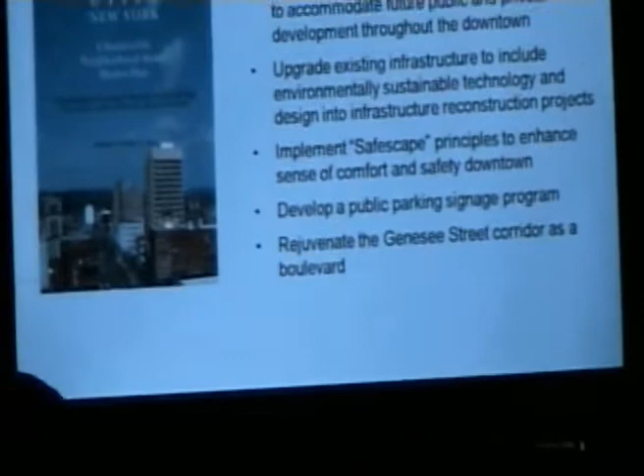And in going through that master plan, there is a specific section devoted just to downtown. In looking at that section, there are a number of goals and objectives that were included in the master plan that have been incorporated into this plan, including the 5 bulleted goals and objectives on the screen now.

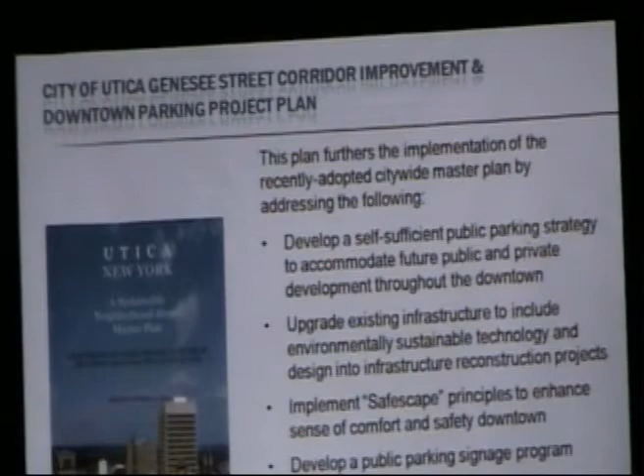First, mentioned in the master plan was to develop a self-sufficient program for public parking, meaning a plan that pays for itself, that accommodated future public and private development throughout the downtown.

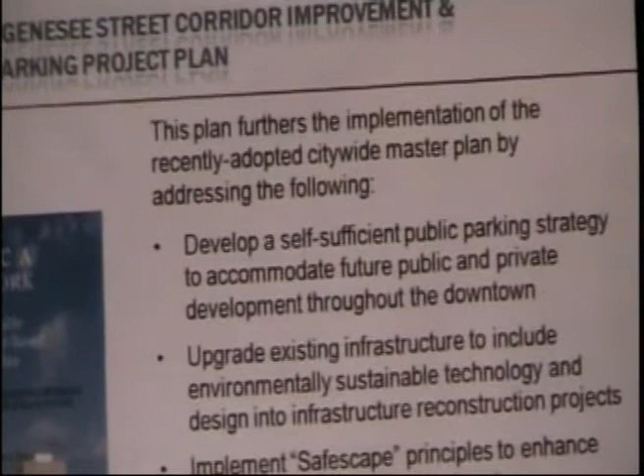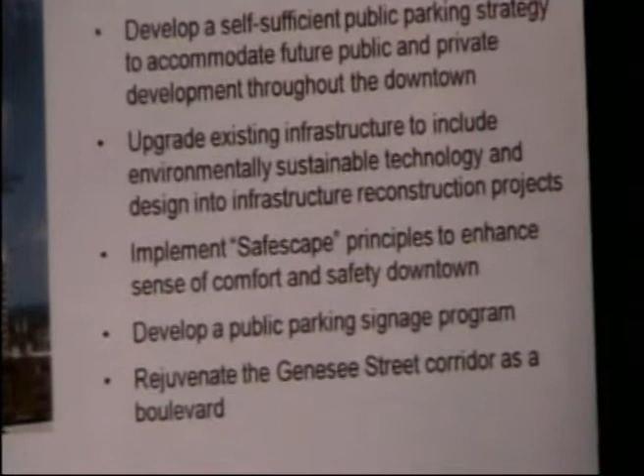Second was to incorporate environmentally conscious infrastructure in any infrastructure project throughout the downtown. Third was to utilize safescape principles, meaning that any streetscape that's designed is done in a way that keeps in mind the safety and perception of security that people have when they visit the downtown.

The fourth goal and objective in the master plan that we incorporated into this plan was to incorporate a public parking signage program. When a lot of us go to other downtowns, you often see the blue letter P sign, which indicates public parking in a lot of different municipalities. The city of Utica doesn't have that, and for a lot of visitors, it's difficult to know when they enter the downtown where the public parking opportunities are. We're seeking to address that through this plan.

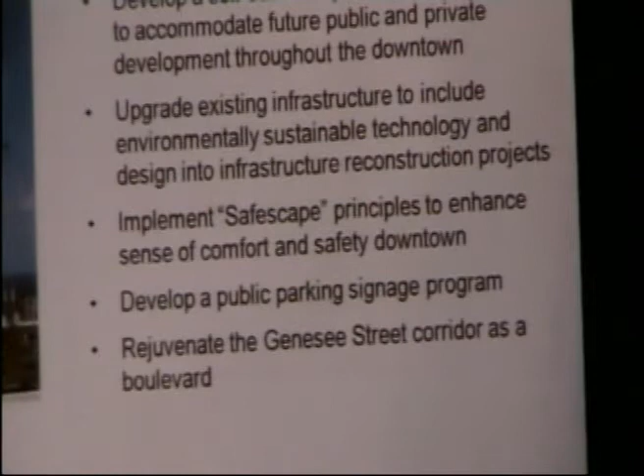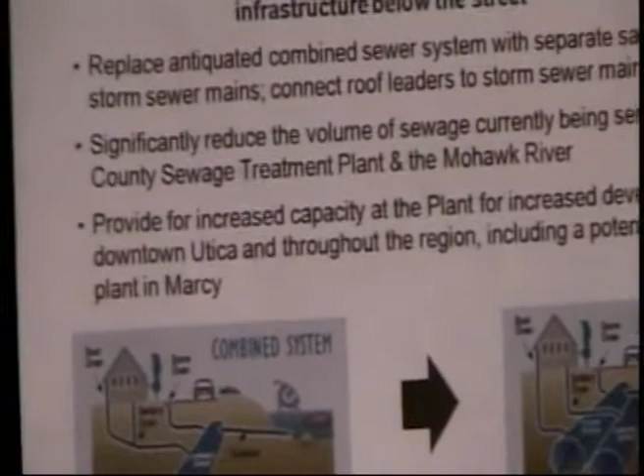And finally, the master plan called for rejuvenating the Genesee Street corridor as a boulevard. With that, the first project goal was to enhance economic development opportunities in the downtown, as well as citywide and regionally, through a complete reconstruction of the sewer infrastructure below the street.

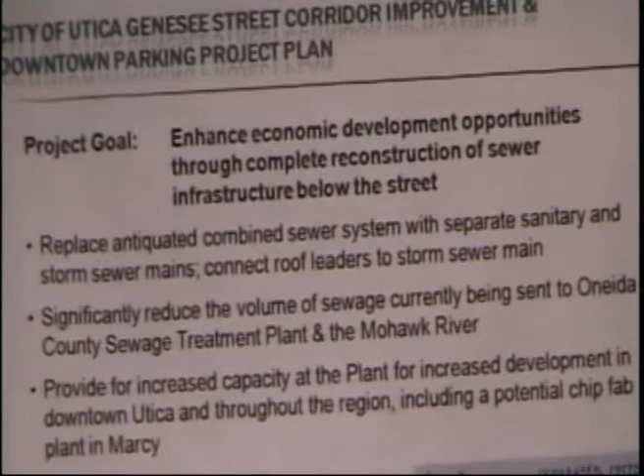And with that, Goran Smiljic from the engineering department will explain what's currently below the street and what we are aiming to do with the proposed project. Good evening, my name is Goran Smiljic, I'm Deputy City Engineer for the City of Utica. What we are trying to do here with this grant is address one of the biggest issues and biggest problems in the City of Utica, which is downtown.

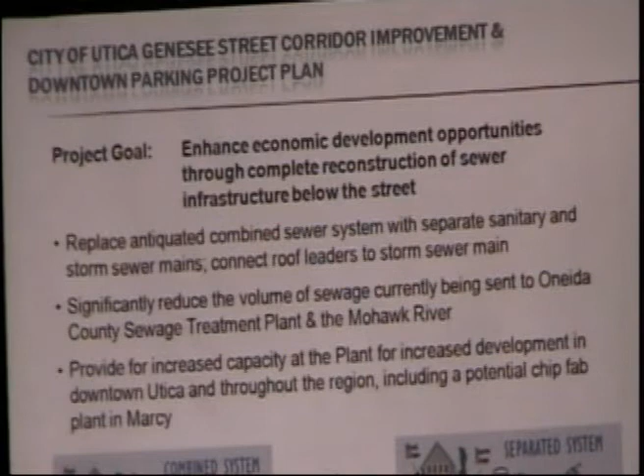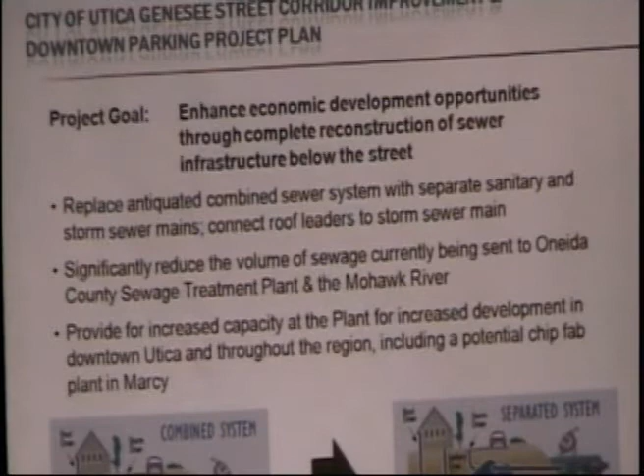All these years we've spent probably over $80 million fixing the sewer in certain spots. Right now we are doing a huge investment in West Utica, separating. We have a plan to go into East Utica, but we never actually tried to address downtown, considering the reason for it, because the cost is so much. When this grant came forward, we tried to say, okay, what's our biggest problem, what's our biggest fear? And we said downtown, and how to address these issues.

What we have right now downtown is a combined sanitary and storm sewer, which means every time it rains, combined sewage together with storm water goes under one pipe under Genesee Street and goes directly to the plant. During not-so-heavy storms, the plant itself can handle the volume of sewage coming to the plant. During heavy rains, the gate at the plant receives its maximum, shuts the gate off, and overflow goes directly to the Mohawk River.

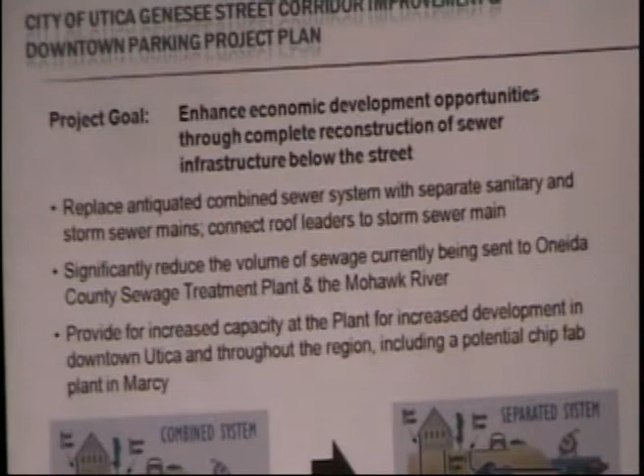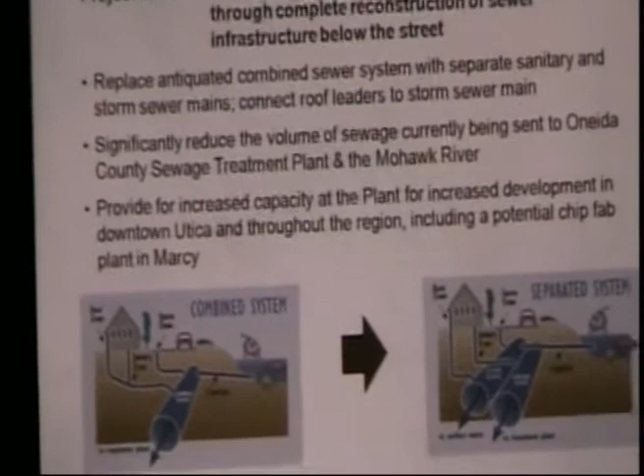We took this plan into consideration, saying okay, how can we address these issues, what's the problem, knowing that some of the infrastructure in Genesee Street, especially downtown, is built in the 1800s. We don't actually know what we have down there. It's so old and so complex that once you open the street and see what's going on down there, we're trying to address all these issues and problems.

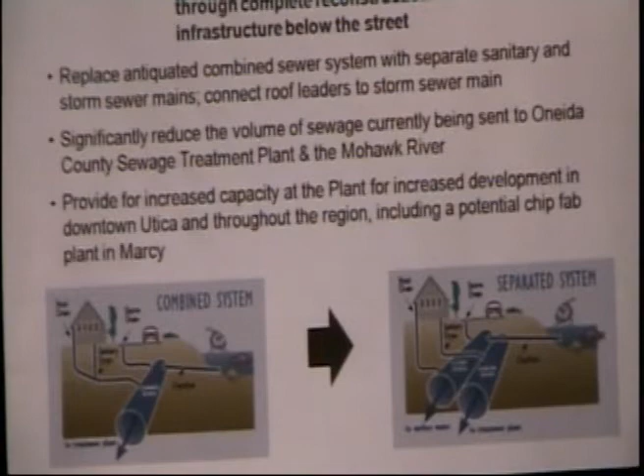As for what we would try to do, there's a couple of different options that we are working on. There's rooftops, there's a huge amount of water that's actually collected in roof drains.

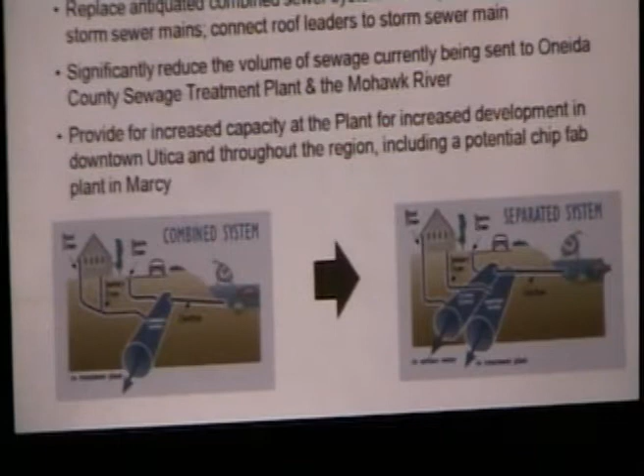Usually in these types of buildings, the roof leaders are inside the building, they go directly to the basement and connect to the same pipe. It's hard for us to invest public money into private properties to make changes to the building, but we are taking into consideration adding an additional pipe under the sidewalk for the future, when grants become applicable for private citizens. They can apply and connect their roof leaders directly to the pipe, which will be separated from the sanitary sewer.

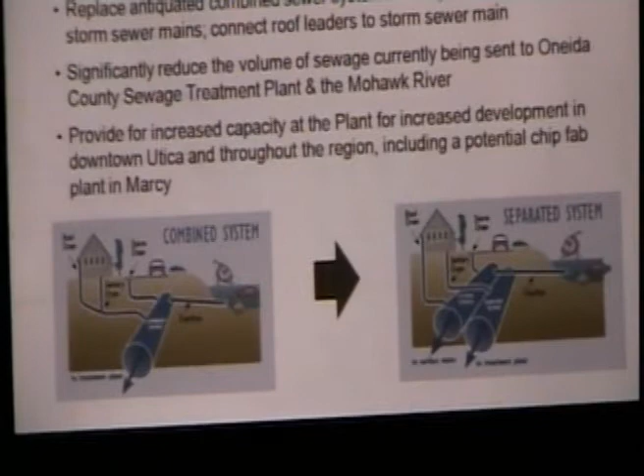I mean, is this a little bit confusing? But any questions on this part? Yes, is this right?

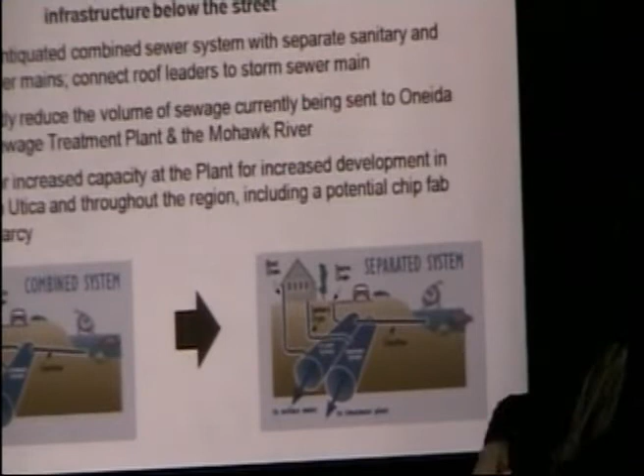Yes, what you have right now, just to give you an example, in Utica downtown we have two problems. One is runoff from the street and parking lots, that's easy to deal with in this case.

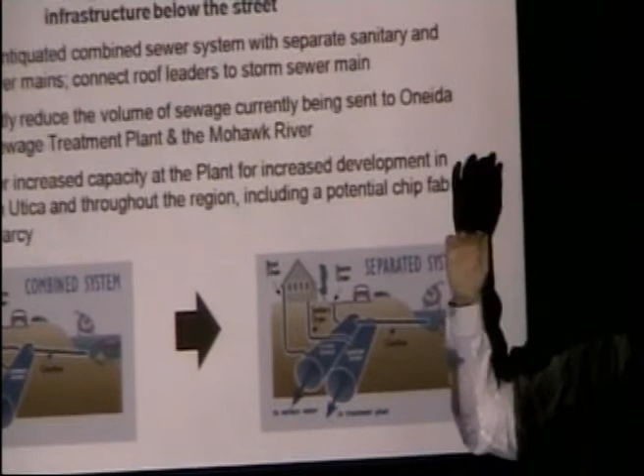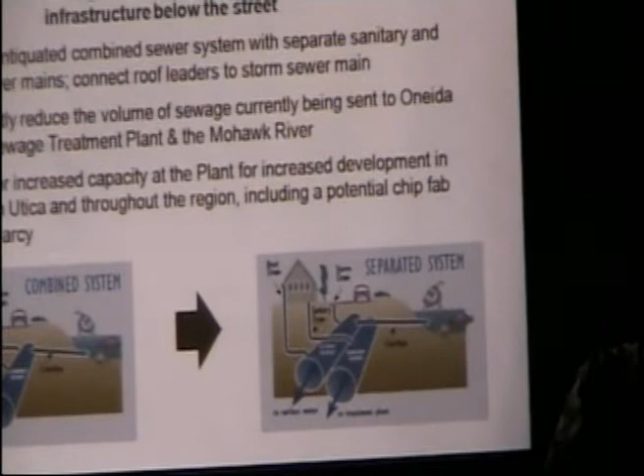The problem we have is the building itself. High-rise buildings usually have a flat roof, and their gutters are not on the outside, they're in the middle of the building. They go directly down through the middle of the building to the basement and connect with the sanitary sewer. We cannot go directly into the building, maybe on Oneida it would be too expensive, but we are considering separating it now on Genesee Street with what we have, and thinking ahead about how we can address the roofs issue in the future.

We are planning ahead, saying we're going to leave the pipe under the sidewalk on each side in case future development happens, so we're ready, because we'll be disturbing such a huge amount of sidewalk. It's a good idea to plan ahead and just leave the pipe there for future development.

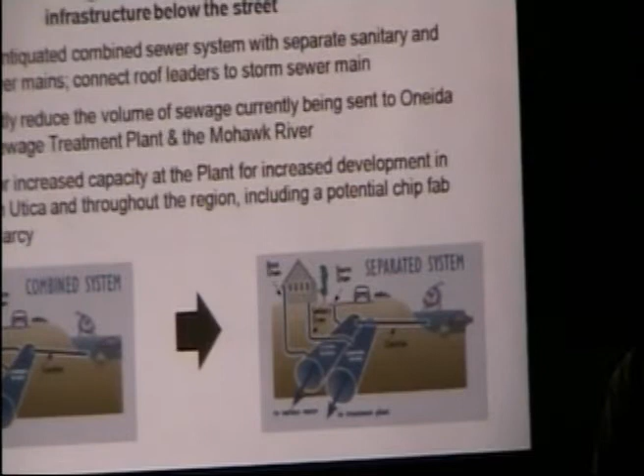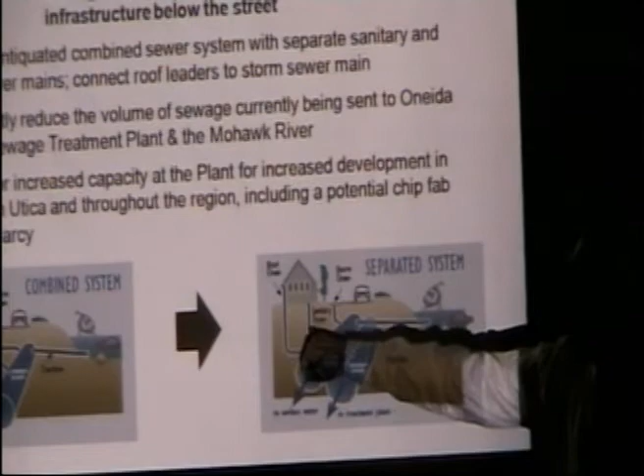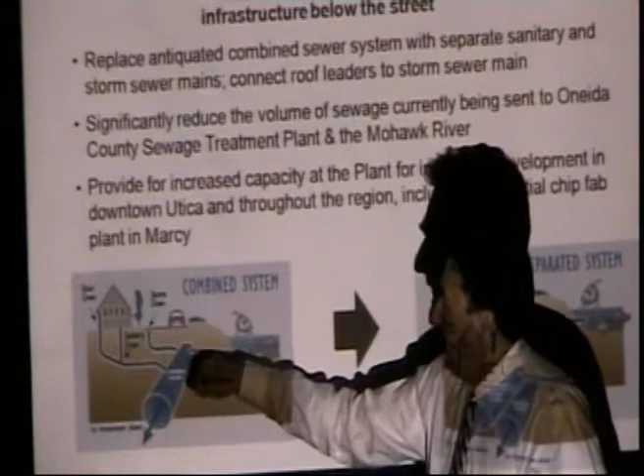But what we have right now, in this case, is a residential home, but downtown this pipe is usually in the middle. It connects right here, and in this example they connect and go to the one pipe, and this is kind of an overflow. The combined sewer goes to the plant, reaches its maximum, the gate shuts off, and another gate opens here, directs the flow, and goes directly to the Mohawk River.

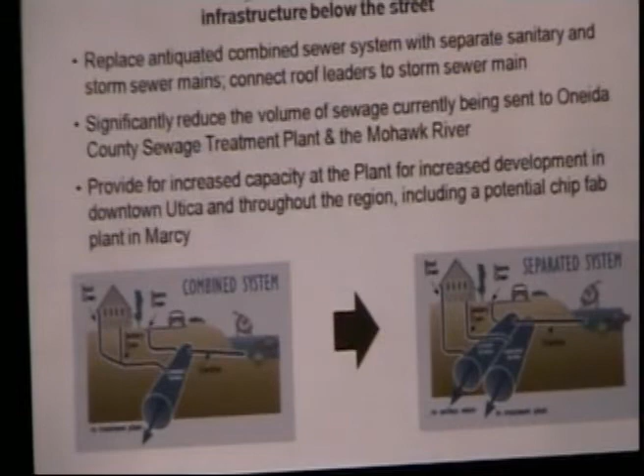It's huge, we have to comply with this. There's no chance of us not complying because the DEC regulations tell us to do so.

Excuse me, I have a question. Yes. You're separating the drain and the sewage. That's correct. How far are they going to go with this project?

How far down, Jeff? To the bridge? No, what's happening is we have another pipe we applied for. It's a two-part grant. The other pipe is going to go from the bottom of Genesee Street, we're going to go across on Elizabeth and try to connect ourselves to Ballou Creek.

That pipe itself has an approximate estimate of $1.4 million. We are trying to avoid it, that's our second option. If elevations work out fine and everything is designed correctly, our first option should work. Our second option is actually to drill under the railroad, which is more expensive, and we are trying to avoid that. Those are a couple of different options.

We want to go all the way to the plant. Okay, that's it, it just didn't make sense because you were showing us two pipes. Two pipes, are they going to stay separate all the way down? Well, I guess they're going to stay separate the whole way, that's the whole point, to the sewage plant and to wherever you're going to dump it.

If I keep them separate the whole way and put them back together at the bottom of Genesee Street, it's good for now, but I still haven't done the second portion. This is complying with the DEC within the county. What we're trying to do is stay ahead of the game, and when you apply for the grant, we have to do this no matter what. I would rather see this work done with a grant than have the city take the burden and invest such a huge expense.

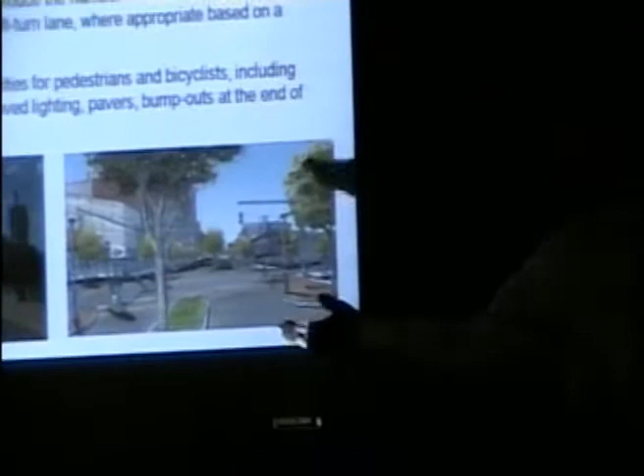There's an option to do half, then half, maybe move traffic one way to the left, then move it to the right side. That's one possibility, but once we get into detailed design, we're going to decide what would be the best possible option. Not just for us, because for us the easiest way would actually be to close Genesee Street entirely and tear everything up, but that's not how it works.

You have to take into consideration business hours, whether it needs to be open for holidays, the St. Patrick's Parade, or the Boilermaker. All of that has to be taken into consideration when putting out the RFP for proposal, same as with any other project.

Storefronts, you know, obviously you're talking about both sides of the street. Yes. There's an option for one block, or maybe we should do half a block on one side and half a block on the other side, still keeping it accessible.

One of the things we will do is we've talked to Schenectady and other areas that have already done it or are currently doing it, to determine what path was the least costly and what worked best for the merchants at the same time.

However, let's be frank and honest, whether we do the median or not, at some point, as Warren's saying, we're going to have to do something with the stormwater and sanitary by mandate. So whether it comes out of our pocket and we have to bond for it, or we're successful with a grant, at some point the separation of the sanitary and storm sewer within the whole city of Utica has to happen, just like we've done over on the west side.

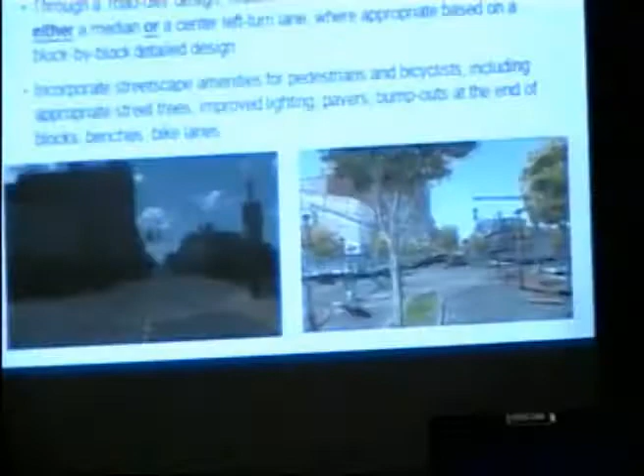I think that's one of the reasons why we're not under a mandate, because we've been successful with some of these grants and we're showing that we are doing the right separating, so we're not really under the gun as much as some other municipalities are. But they're constantly, we have a long-term control plan that you have to comply with. We would send it to DEC and EPA, they would have to review it, and they have to see that we are actually doing something to comply with these laws and regulations.

Think about it, sometimes people, I know that it costs money, but sometimes people have a moral obligation to do something about this. We cannot ignore all these problems and wait till somebody else down the road does something about it. If you want to protect the Mohawk River, just by protecting that we are saving money ourselves, because the water that doesn't have to be treated, you're paying to be treated at the plant right now. And if you can do that, invest some money and do as much, yes.

As mentioned, the aim of the project is largely infrastructure related, to separate the storm and sanitary sewer. But while that construction is being done, the plan is to take advantage of that construction work, and when the street, the sidewalk, the curbing, everything goes back in place, to put something that's updated. The current streetscape is tired, it's old, it's been the same way for the last 50, 60 years, and we're looking to really change the aesthetics and bring a freshness to the Genesee Street corridor.

So we are looking at a road diet design, narrowing the street from 4 lanes to 2, with a center turning lane or a median where appropriate. And in addition to the median, we'd also look at the redesign of the sidewalks between the curb and the buildings, looking at such things as benches, pavers, additional landscaping, lighting, those types of amenities for the businesses as well as the pedestrians.

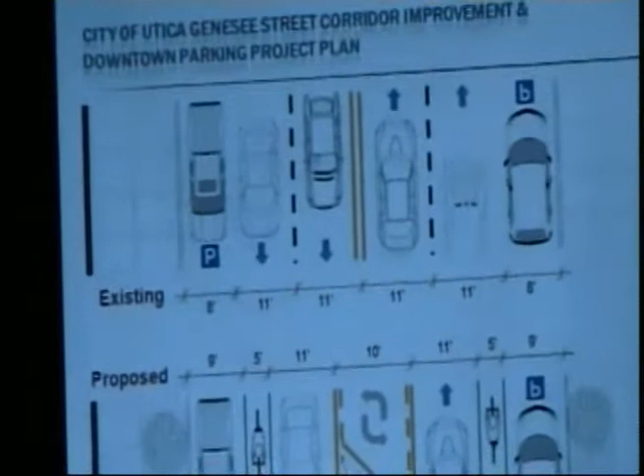If I can say, this is what you have existing right now at the top part. But what it says here, 11 feet, is actually being generous. In some parts it's 9, 10 feet, actually here it's never 8, right now it's 7, 6 feet. If you notice when you drive on Genesee Street, the cars parking on the right side, pay attention to the white lane, it's always across that lane, which means there's not sufficient parking space for the car to be there. Actually, Genesee Street should be 2-way each way without parking, but they jam the parking inside and reduce the width of the lanes. That's why constantly when you're driving, people are creeping into each other. You cannot have 2 cars and a park, it's kind of always moving left, skipping the parked car on the side. Especially during the snow and storm, you really have actually 1 way each way.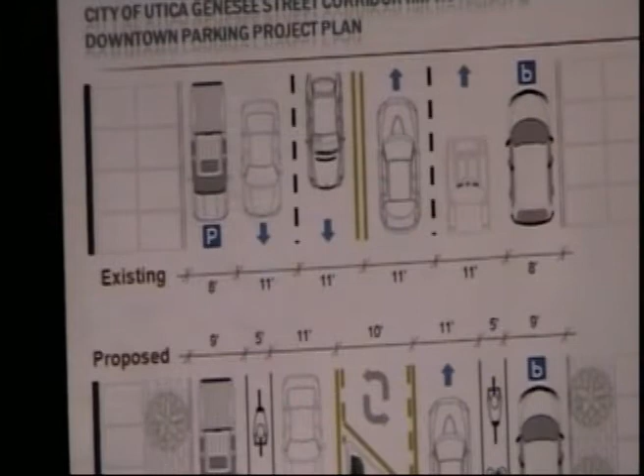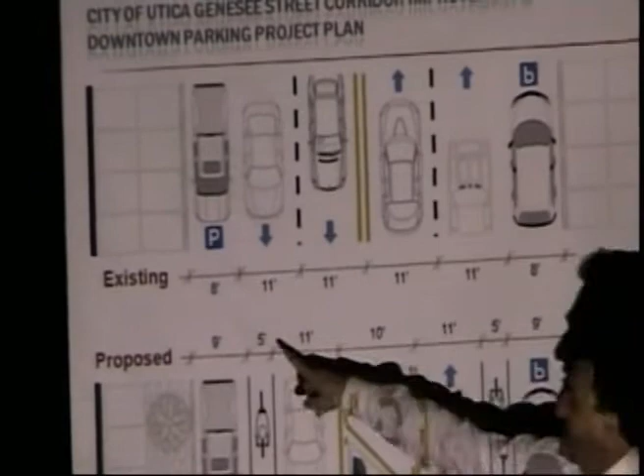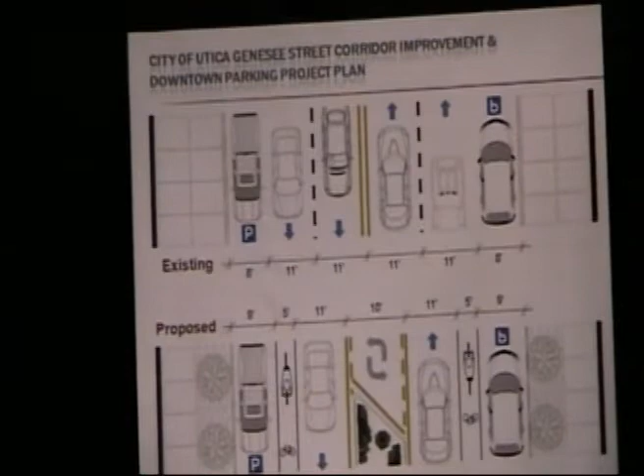But what we are proposing here is actually, this can vary. We can have 11, 12 feet to 8 feet this way and a 5 foot bike lane. The reason why we have a bike lane, 2-way, makes it more city-friendly, pedestrian-friendly, and actually gives you more space in an emergency that you can maneuver with the vehicles. In case this car has to pull to the side, the other car can drive around it in case of an emergency.

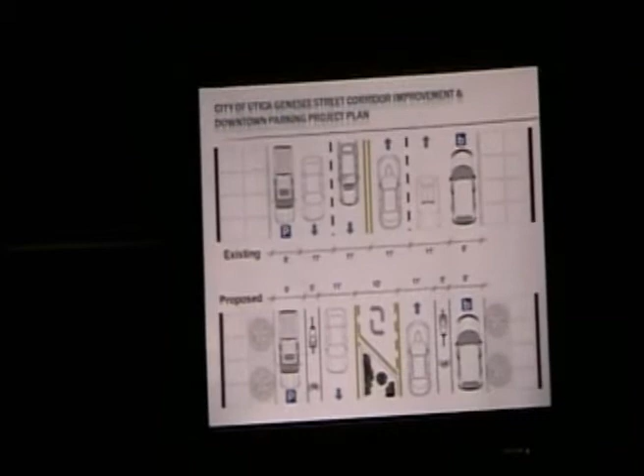And hit a bicycle. I mean, you can hit bicycles too, right? No.

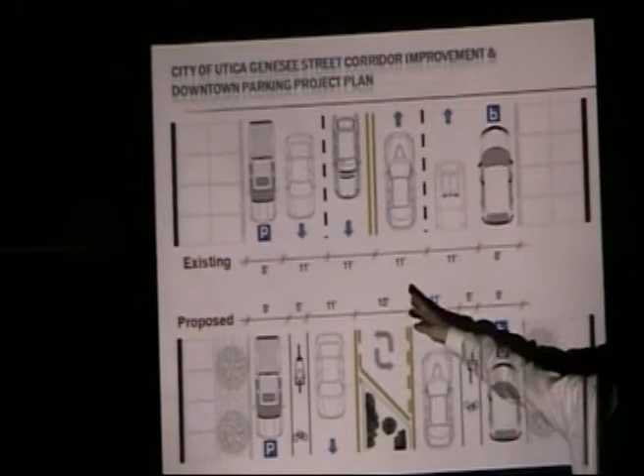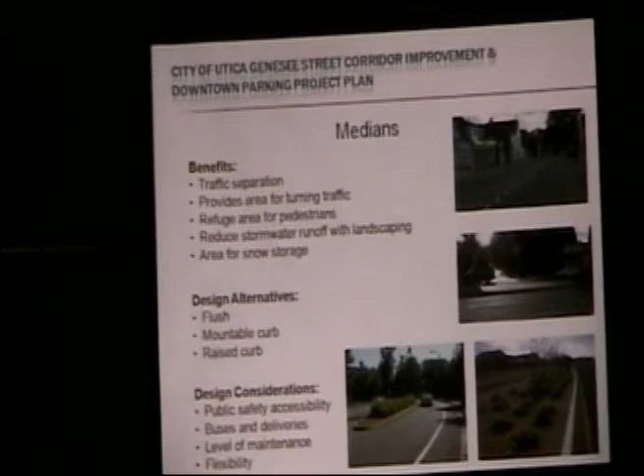But all the regular movements to the left are allowed, as you can see on the plan that you have right now. And one of the biggest questions that we've received since we've unveiled the plan is concern about the median. I think people look at the rendering that was done for the master plan and see trees down the median, but that's not necessarily the way it's going to be. As Goran and the mayor have mentioned, as we get into more detailed design and engineering, we'll go on a block-by-block basis and look at the specific design of the median itself.

And there's different types of medians. In the graphic on the top, the median is level with the street and is just delineated by pavers and painting. In this photograph, it's a mountable curb so that public safety vehicles could drive across if necessary, with no landscaping, just a hard surface. And these two show some landscaping, from a minimal amount, low maintenance, to a higher level of maintenance.

So this is really intended to show that there's a wide range of designs for the median. If you look at the graphic we have up here, I think there's a lot of concern out there that the median is going to be one single strip running from Oriskany Boulevard to Oneida Square. But if you look at what we presented, you'll see that that's not the case. It's a fairly well balanced between a center turning lane, which still allows for efficient movement of traffic so there isn't that congestion people are concerned with, and the aesthetics of a median.

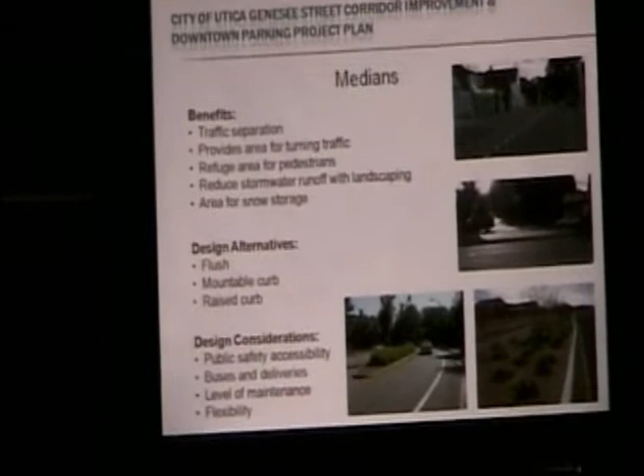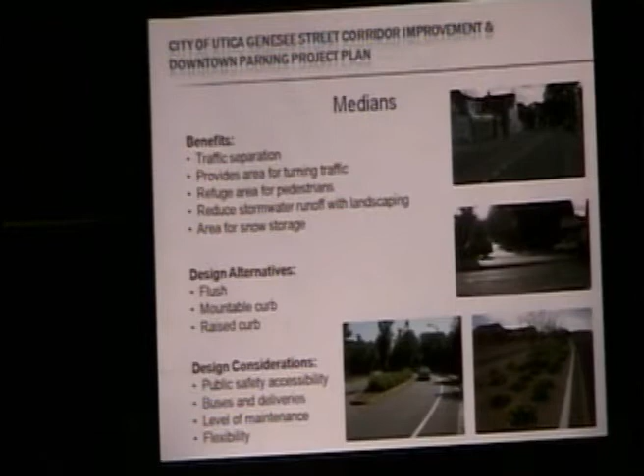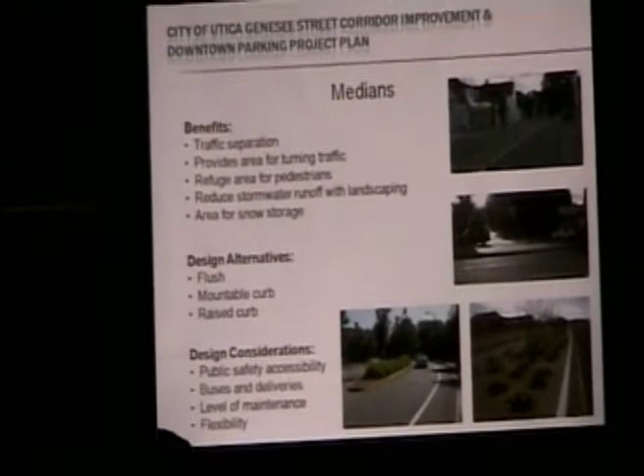I think once you come up here later and actually view where the median is going to be, where the turning lanes are, and how it's really put together - that fear that's been out there, that you're going to see a wall from one end to the other - it's not where it's at. Take a look later, there's a conceptual rendering showing what it looks like, and that's authentically Utica, that's us.

If you're going to take away the bus stops - we're not. It's not us, it's Central.

So they're going to take away the bus stops? Right. So people that would normally use the buses to come downtown, you're going to put them over here, drop them there, no longer on Genesee Street? No - they're going to drop down at whatever the stations may be. They're still going to have one at 258, they'll have that location for buses.

But there's no reason to have one in front of the APAC building, Franklin, APAC, when you can just walk and wait there and hit the building. The buses will still make a stop if a provider requests it.

What about the Federal Disabilities Act, what are their requirements? Because it seems you're forcing people to come from APAC all the way up here, and some days I have to walk with two canes, my legs are so bad, and others are handicapped too. What are the requirements? Because this city is not exactly handicap friendly.

Currently there's one parking place per block for handicapped vehicles - that's it. And I can take you out and show you, every block on Genesee Street between Oriskany Boulevard and Oneida Square, one per block.

And there are many handicapped people who get off buses and go to sandwich shops, Key Bank, and the existing businesses there that are financially marginal now - when this construction starts, what kind of accommodations are going to be made for these businesses to continue?

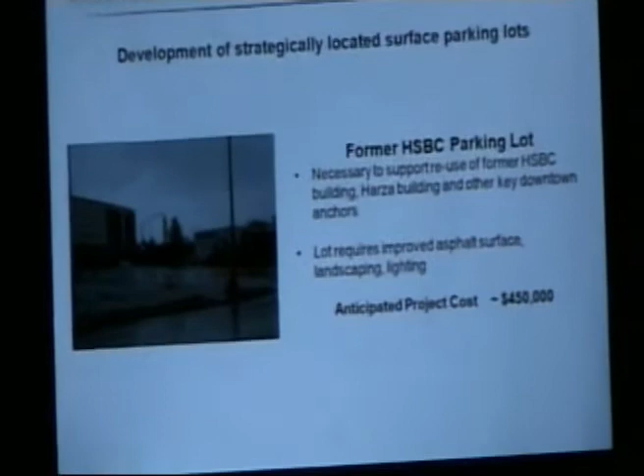What I want to do is continue so we can ask more questions. We're also proposing to develop five strategically located surface lots, off-street parking areas throughout downtown. This is the first lot, the former HSBC parking lot, necessary to encourage revitalization and reuse of the former HSBC, the Harza building, and other key anchor buildings downtown.

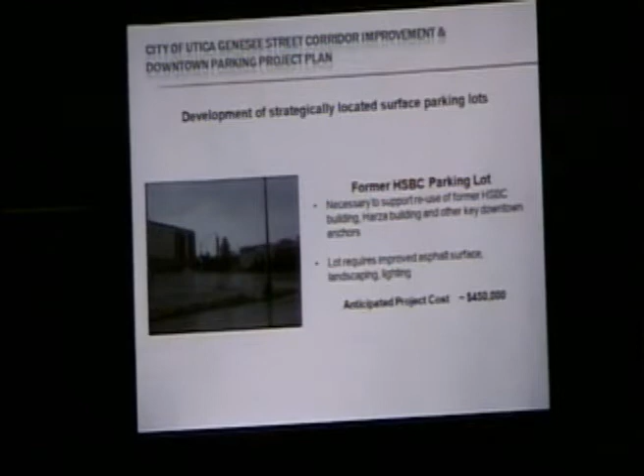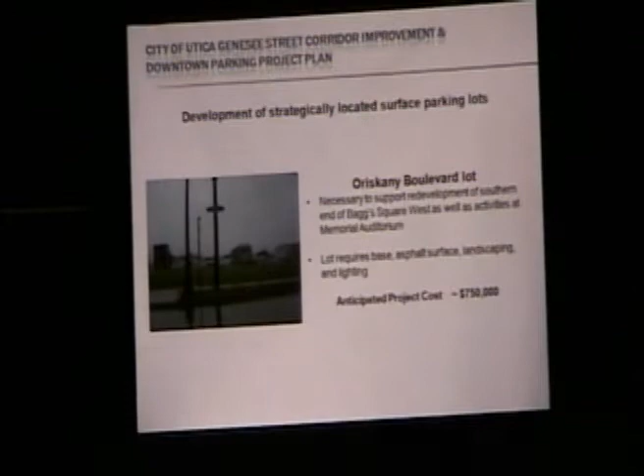The second lot is at the southern end, what we're calling the Oriskany Boulevard lot. It's currently occupied primarily by Smith Packing. The city owns a number of lots there. Development of this lot would help with Aud events, as well as some development underway within the Bagg's Square West area.

The third lot is along Whitesboro Street, on the north side at the northern end of Lower Genesee Street, previously occupied by a business called Horrick-Ibbotson. You're all aware we've seen quite a bit of development along Lower Genesee Street with Master Pizza, Tailor and the Cook, and a number of other businesses that have recently opened there. There's additional development expected in that area.

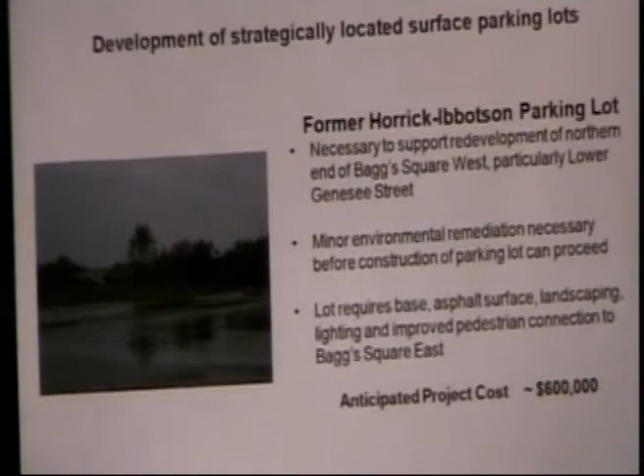We've talked with all the business owners, and they've cited parking as a necessity. When we ask them what they view as the most viable option, all of them come back to this particular lot. The city does own all the parcels. There is some minor remediation that needs to be done, but it's a lot that could conceivably hold upwards of 100 cars.

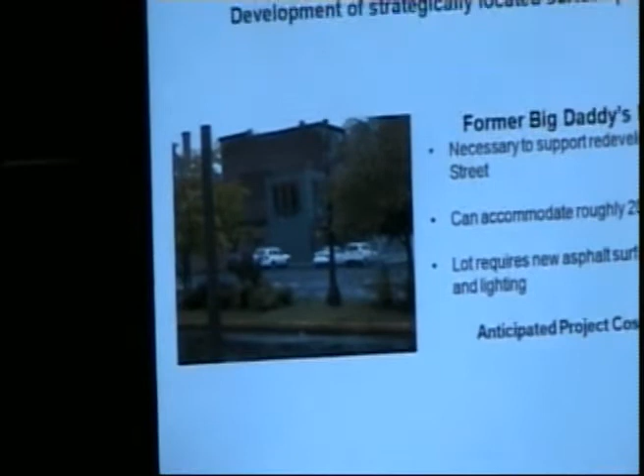The fourth lot, again named for a former business located there, the former Big Daddy's parking lot, corner of Bleecker and John. Development of this lot supports development that has occurred over the past several years on Bleecker Street, and fulfills a commitment made by the previous administration to develop a public parking lot at this site.

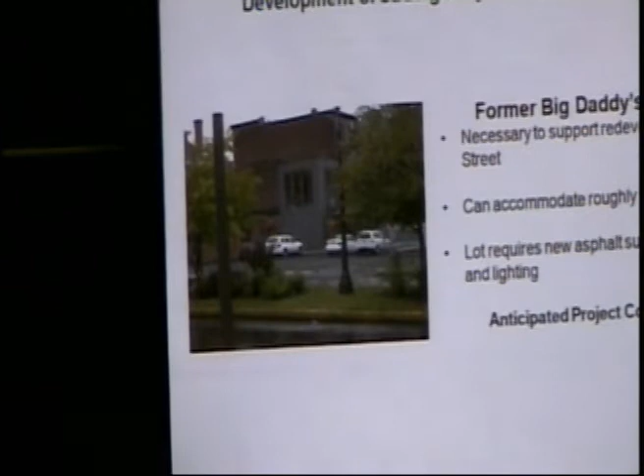The fifth lot is the Bleecker Street lot, next to the multimodal center right across the street. This lot really serves two purposes. It's fairly small, so it won't accommodate more than 8 to 10 vehicles, but it will also reestablish Post Street, which was a one-way alley running between Burnett and Charlotte Street. That was closed and dead-ended with the construction of the multimodal center across the street. As part of the design of this lot, we would propose reconnecting Post Street as a one-way alley to Bleecker Street.

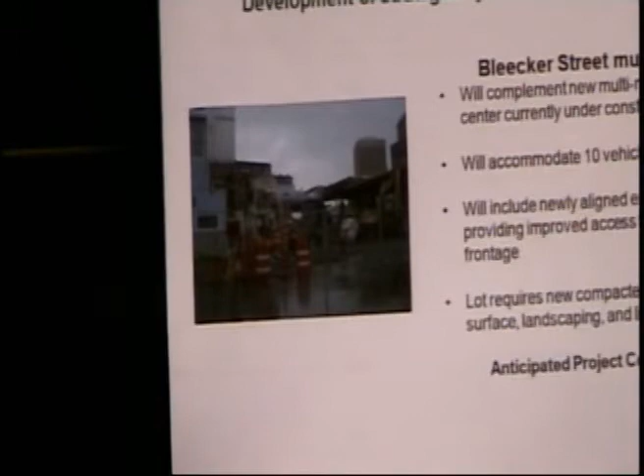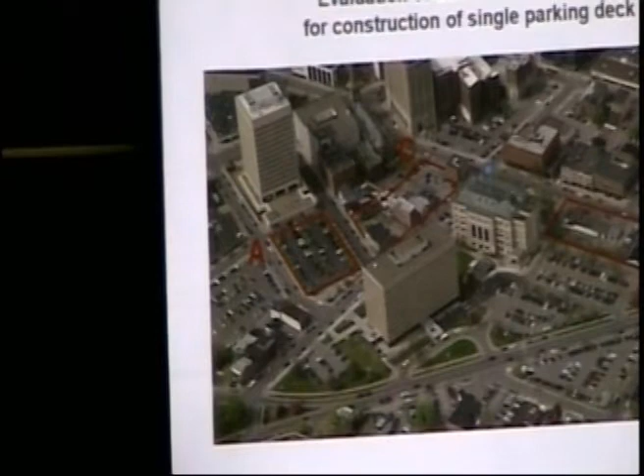We had also mentioned the evaluation of three alternative sites for a possible parking deck. Mayor, did you want to? We could get into the options that we have at this point. Did everybody see this pretty well? And through here, let me just back up.

In January, when I came into administration, we started putting things together. The first thing I did is, there's been talk about a parking garage, parking substations, surface lots throughout the entire city, but really nothing ever transpired out of it. What I wanted to do is, once and for all, make sure we had the money that was allocated to it, secure it, and then entertain the idea that the county has a parking problem, so did the state. So I summoned both the county executive and OGS. We sat down, and I thought that maybe if we could partner, it would be feasible for all of us, all the taxpayers, to do one joint venture.

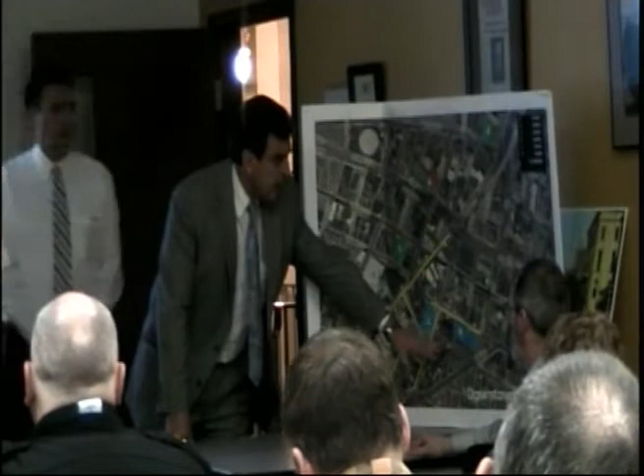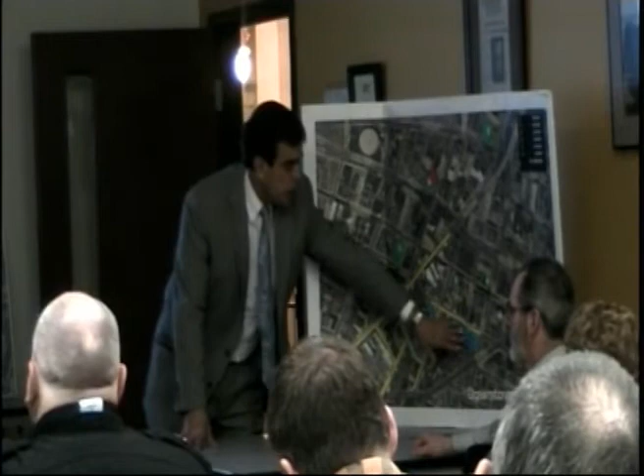As it turns out, what has happened is that the county executive decided that the best possible site for him would be on his campus, site B, over off of Elizabeth Street, acquiring properties and putting his parking into that. OGS would not entertain doing either B or C because they had site control, they owned it, they wouldn't deviate from that. So C is an option that was talked about plenty of times along Charlotte Street. So our option now, the city, is to look at partnering either with the county executive or OGS at the state office site, or doing it on our own over on C.

We do not have the numbers. The initial numbers were, if we partnered with the county executive, it would come into the deck. It would be initially the least costly. I have not had the final numbers to determine that. We're talking roughly 150 spaces, and the cost we're talking about. The concern that I have if I partner with OGS at this point is that it is a garage, and there is a maintenance cost with a garage. We're having a very difficult time maintaining our garages at this point. So I'm looking for, A, if they are going to fulfill the obligation of maintaining it, or if it's going to be our responsibility. That number has not come back to us.

And C would be, again, the city of Utica going on their own. I've talked to a couple of the owners over here. The spaces would be roughly 118 spaces, and the cost would be several million dollars. The least costly at this point seems to be B. Bill, to your point, that would be a deck. That would be a deck that we would have. A would be a parking garage. We're talking roughly 200 spaces. And once again, C would be just surface parking, because the deck over here would be much more costly. And to pick up roughly 40 spaces, I don't think it's feasible for the city.

The next three slides really talk about each of the individual options. Again, this is A, behind the state office building. Our preliminary estimate is that the city share would be $3 million for roughly 200 spaces within that garage. There's a savings to the city because the state owns the property - we don't have to acquire the property or do any demolition.

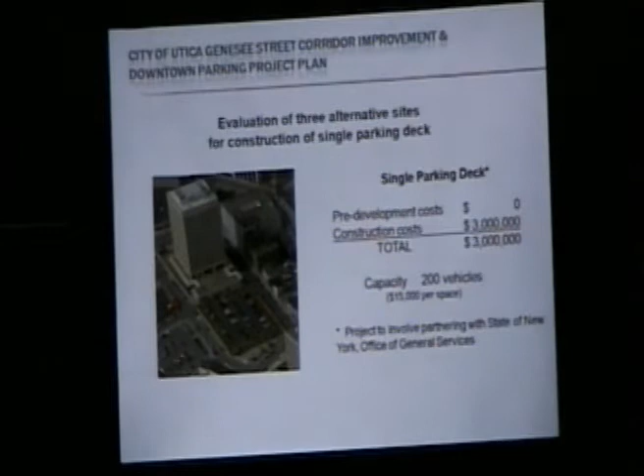In a similar manner, the county's moving ahead with what we show as Plan B on their own currently. Again, their cost is in acquiring the property and demolishing the buildings on those properties, so there's a cost savings to the city as well for this option. The early number we have for construction for the city share is 1.1 - that's changing - for roughly 150 vehicles. The diagram at the bottom shows you something of what a deck would look like.

I believe the county executive's plan is to park on the upper tier, so if the city partners with them, the city parking would be on the lower tier. If the city chooses a different option and does not participate, you'll essentially see an 8-foot high wall along Elizabeth Street.

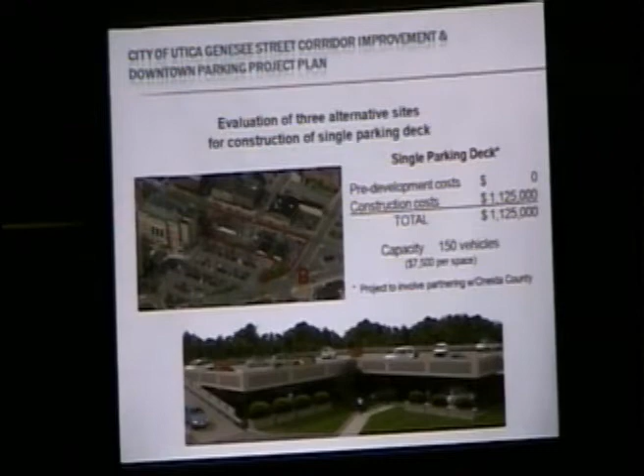The third option, as the mayor talked about, option C, is a collection of largely privately owned properties between Devereaux, Elizabeth, and Charlotte Street. Because we're not partnering with the state or county for this option, it would be up to the city to purchase the property, handle any asbestos or oil tank removal, and demolition. So there's an added cost. The location is probably, of the three, the most preferable, but it's also the highest cost.

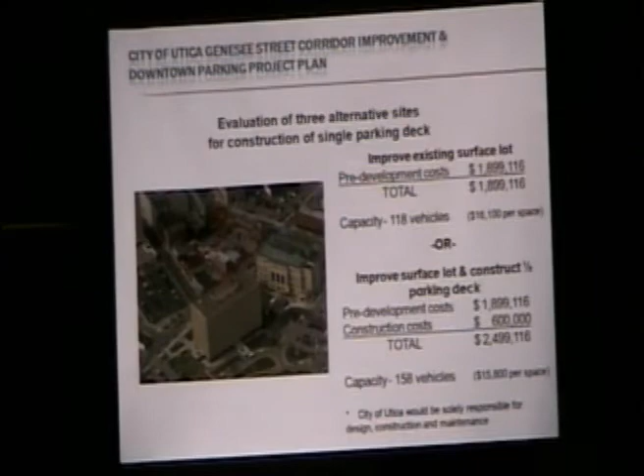Just so we clearly understand, the Devereaux property is not part of it, and also the Elizabeth Street property that was in abstract is not part of it either. Those would not be among the acquisitions we'd be looking at. It would be just about everything else in there, plus some of the buildings we currently own.

Improving it as a surface lot is the top number. We've estimated about 118 vehicles could be accommodated on that lot. We also looked at the possibility of constructing half a parking deck. If you look at the entire block, the slope of the lot from Devereaux to Elizabeth would facilitate the construction of half a deck, but the construction cost to pick up 40 vehicles is fairly high.

Question on these parking garages. We have cost per vehicle for construction. Is there any projected cost for snow removal, maintenance, and for personnel to clean and attend the garage during the day? In other words, what are the yearly costs per vehicle?

As the mayor said, in his discussions with the state, OGS, we've asked how they would view maintenance of a facility that they would own, and what the city's responsibility would be. That's still being worked out—we're waiting to hear back. As for the surface parking lot, if we do it on our own, it would be the same as we're currently doing on our own parking facilities at this point.

Isn't it more expensive on a parking deck to do snow removal? You'd have to bucket it and load it on dump trucks to remove it. Well, that would only apply if we had a deck—I think it was clearly identified with the county that they would take the deck, and we'd take the bottom portion. Somebody, one of the taxpayers, has to pay for the snow removal. Oh, no question about it, unless they put heated concrete in it. Yeah, there's always a cost.